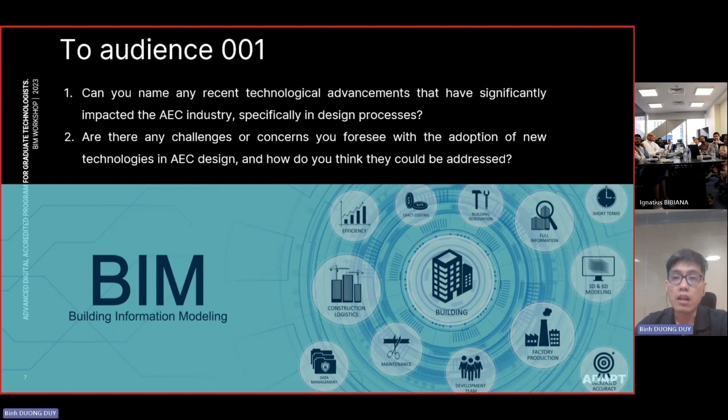A couple of ideas you mentioned are also covered in this slide, based on our ADAPT study. The big changes in technology happening right now in our industry: first we need to mention augmented reality, because this is very important now. Most advanced design offices already have their own team on how to utilize the BIM model for visualizations, and augmented reality is the main thing in that visualization technology.

The second is digital twin. I think some of you guys may hold that role too, right? Digital twin is more about the phase operations, facility management, like after design and construction. But they also need to get involved from the stakeholders, like the design team. The consultants also need to be there. So this one also brings a lot of impact into design teams.

The third one will be Internet of Things and big data. Even though that thing is not really so prominent in our industry yet, very soon I believe, based on some studies already, Internet of Things will also change our workflow or our industry in terms of technology.

And the fourth is something you mentioned, that's artificial intelligence. Now it's become viral on many platforms, on many forums. This is a new thing actually, but it's already become viral with a lot of new tools and new products coming from AI.

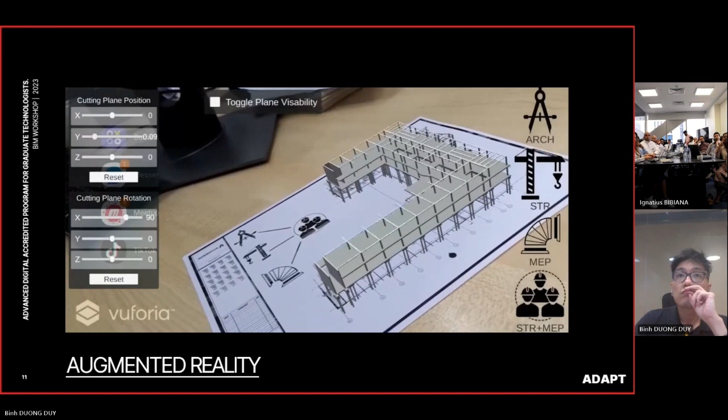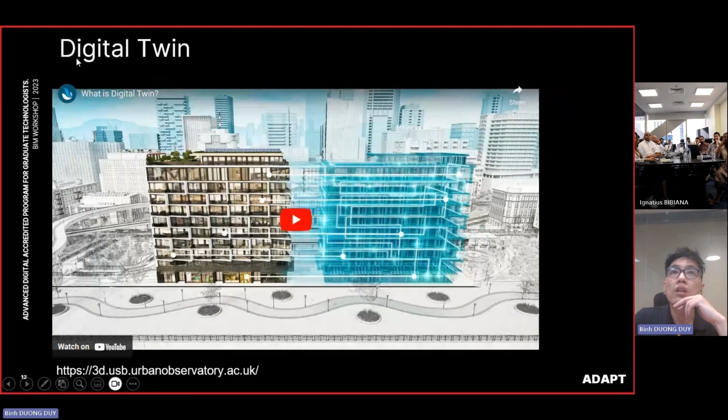I'm using this one video to define what a digital twin is.

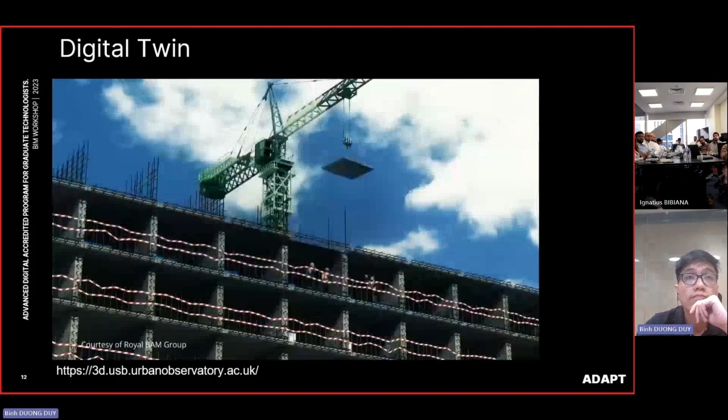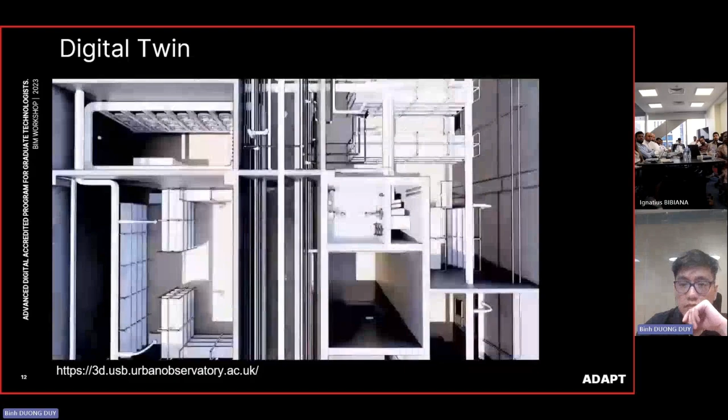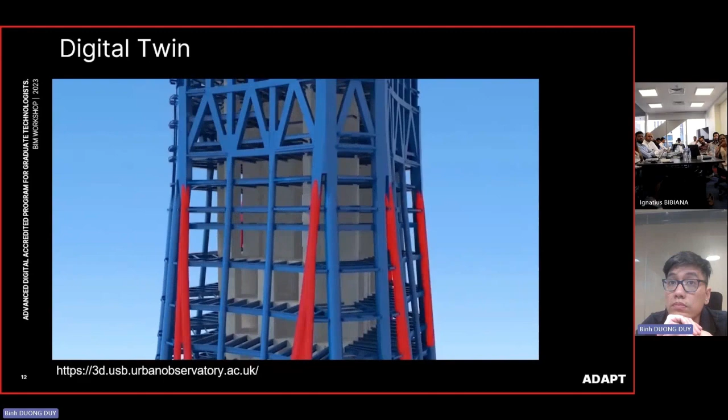But do you know what a digital twin is? Essentially, it's a digital version of a physical object—a dynamic, up-to-date digital replica of a physical asset or environment, built using technologies like building information modeling, artificial intelligence, machine learning, and the Internet of Things. Data from the original asset is used to build and improve the digital twin, which is built based on the BIM model. By providing a precise, up-to-date model of its original, a digital twin can help designers, engineers, contractors, owners, and manufacturers create more efficient structures. Digital twins can help with everything from planning, design, and construction, to operations and maintenance. Consider a building that's already been designed and constructed—imagine there's a digital twin of the entire facility, from the roof to the HVAC to the mechanical, electrical, and plumbing systems. Now imagine that sensors in the building provide the digital twin with real-time information. The digital twin updates itself according to the data. Then building owners can view areas where the building is aging or faulty and make improvements.

On a greater scale, multiple digital twins can be integrated into an entire ecosystem.

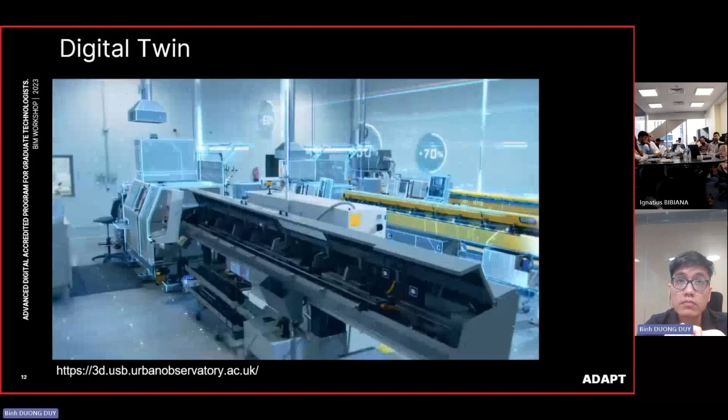So how did digital twins get their start? In the 1960s, NASA was one of the first agencies to use mirroring technology to replicate systems in space. Notably, NASA created a replica of Apollo 13, which became critical in the midst of its challenging mission. Engineers were able to test solutions on the replica to avoid further disaster. Dr. Michael Grieves, Chief Scientist for Advanced Manufacturing at the Florida Institute of Technology, introduced the concept of the digital twin at a Society of Manufacturing Engineers conference in 2002. He proposed a product lifecycle management center that contained the elements of a digital twin: the physical space, the virtual space, and the flow of information between the two.

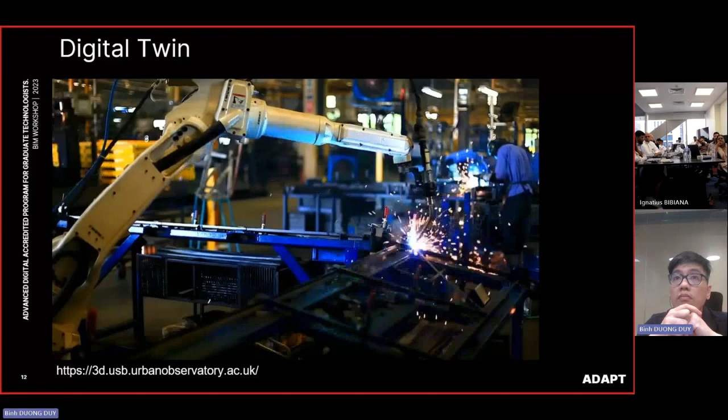The manufacturing industry was quick to adopt digital twins, and the architecture, engineering, and construction industry followed suit, with the help of technological advancements like BIM, or Building Information Modeling. Today, digital twin technology plays a big part in the digital transformation of the design, engineering, construction, manufacturing, and maintenance industries. A digital twin starts with knowledge of the assets and spaces that make up a facility. This type of descriptive twin is a live, editable version of design and construction data, such as a visual replica of assets or facilities. An informative twin has an added layer of operational and sensory data. As more and more data is added, the twin becomes richer and more strongly linked to its physical counterpart. Predictive twins are able to leverage this operational data for insights, while comprehensive twins simulate future scenarios and consider what-if questions. In the future, twins will become autonomous, able to learn and act on behalf of users.

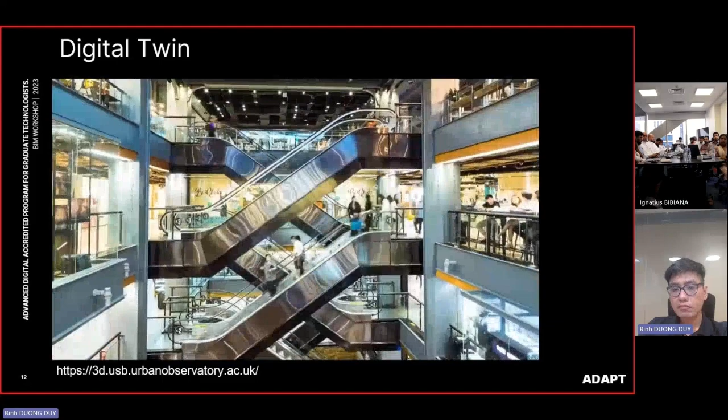Because digital twins can gather key information about things like population growth, natural resource supply levels, and historical data on environmental disasters, they can help build more resilient cities and infrastructures as the world changes. Eventually, an entire ecosystem of digital twins will help industries respond to global challenges with powerful, simultaneous changes. Right now, digital twins are helping operations and facility managers respond faster by removing the need for complex and time-consuming maintenance documents. Owners can gather information from the design and build phases to make faster business decisions, lowering operational and maintenance costs. Professionals on-site can predict material and labor cycles, reducing waste and enhancing safety. By helping professionals gain more insight into the inner workings of the world, digital twins are becoming partners in building a better future.

Okay, just a short video introducing the idea of digital twins. In the video, they also mentioned that the Internet of Things is part of developing digital twin products by connecting sensors.

So basically, a digital twin in IoT is just like having the BIM model connected with real data from the physical buildings or physical facilities. By connecting data from sensors, this allows you to make predictions and utilize that data for running your facility management.

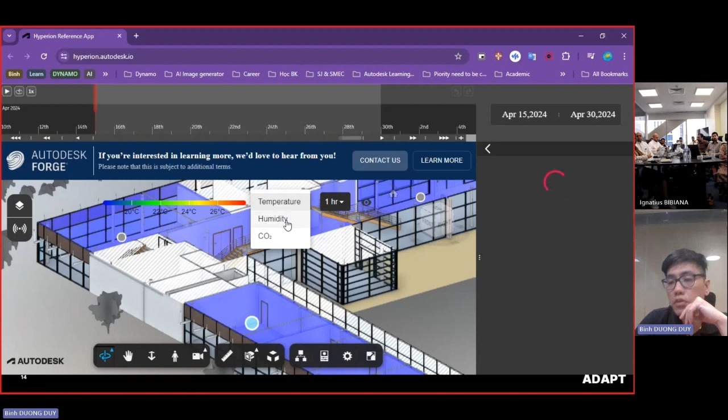What they have are connections with sensors inside the buildings, allowing you to check the data of the buildings, like the temperatures inside every room, humidity of the rooms, and carbon dioxide. From this, you can run your facilities more efficiently and run some analysis for facility management.

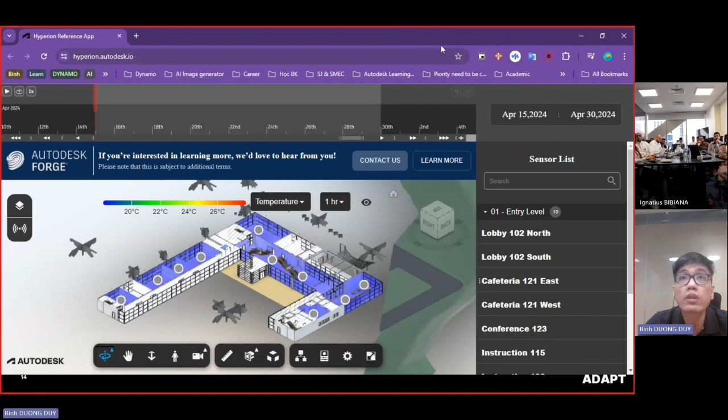This is one video, sorry, one link to try out this idea of what digital twins are. We also have another video link here. I will send this document to you and you can check it by yourself.

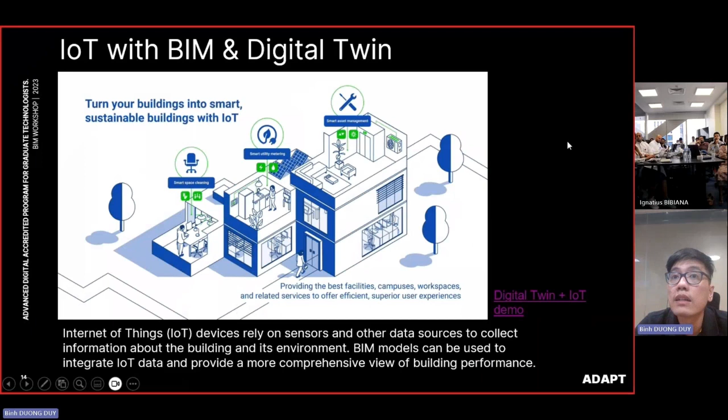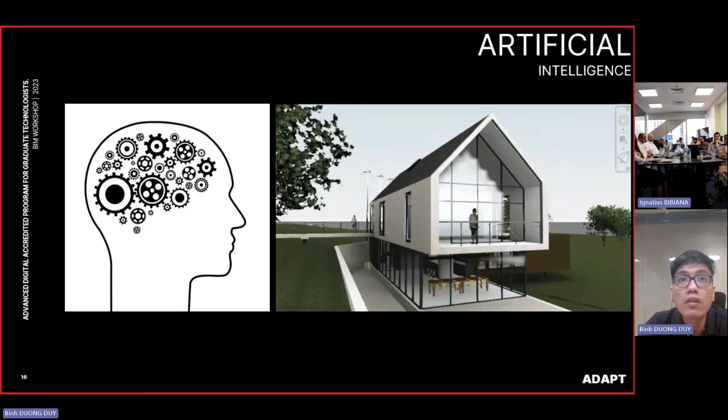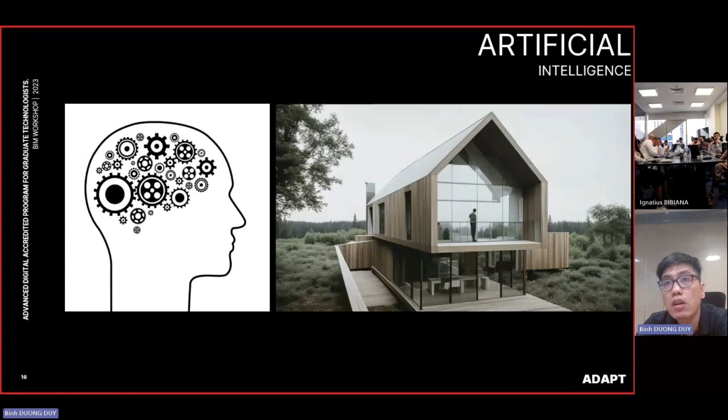Another technology I want to mention here is AI, or artificial intelligence. Right now, we have seen some AI helping to visualize or convert what we call a prompt - it means a text - into an image, or helping to visualize your idea. But actually, AI can do more than that. This is one video explaining how AI can be utilized for quantity checkup.

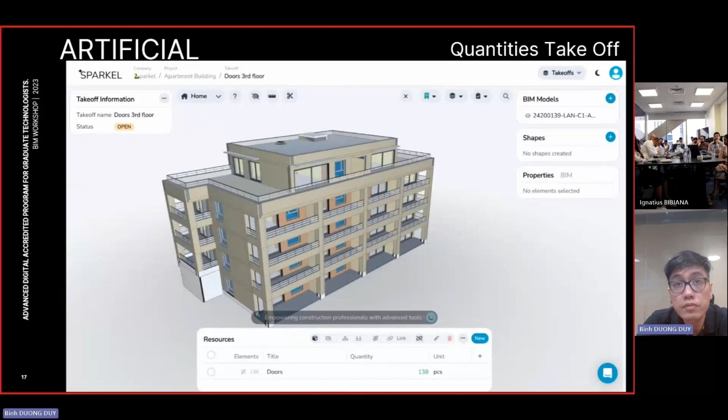Of course, you need to have the BIM model already with you. Just by typing some comments or prompts, you can harvest the information in the BIM model. In this case, the person tried giving some comments like trying to take off some doors and windows on the BIM model using different language. So the AI is able to help by isolating the elements, only doors and windows. So this is one AI already here to help people harvest information like quantity takeoff from a BIM model. We also have another slide to demonstrate how another AI can help, like this one can help on architect work.

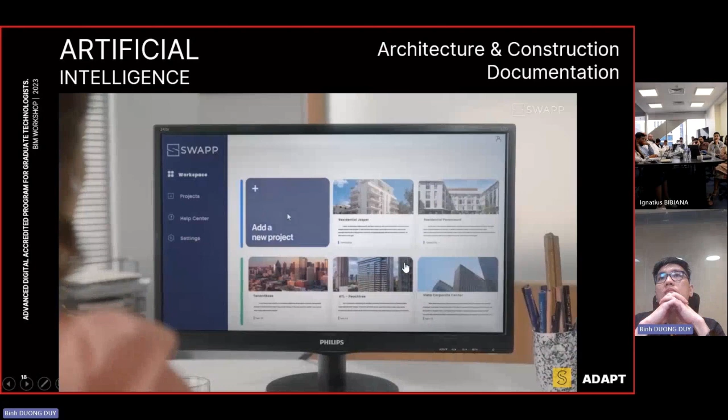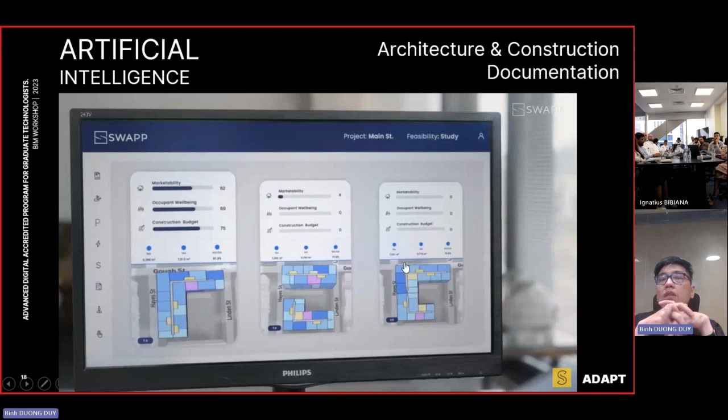Hi, Alice. Glad I caught you. Hi, David. How's the Main Street project? We got the green light, but we need to get things moving fast. So when can we meet to review? Say two weeks? No need for that. Just give me a few moments to upload the details. Here, take a look. This one is optimized for the project's budget. Wow, well, I thought asking for only two weeks was pushing it. This is great, but can we update the facade to what we used in the Wilson project? Sure, like this. Oh wow, wait, are these the full set of construction documents? Yep, code compliant, fully coordinated with structural systems and MEP. Let your GC know we're all set for the permit. Okay, this is all too good to be true. How does SWAPP do all this? Simply put, it's AI in architecture.

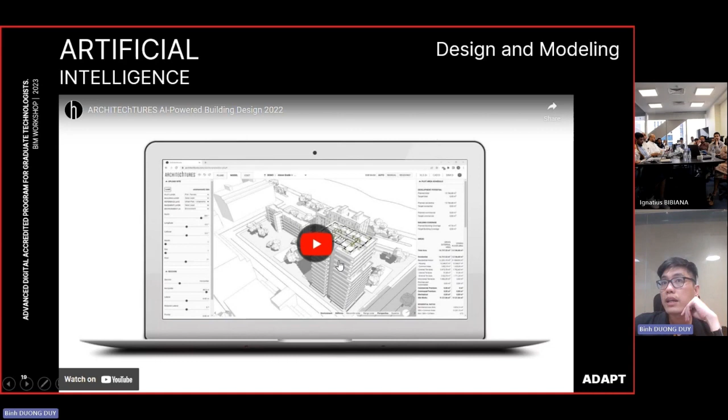Let's SWAPP - yeah, so actually AI now helps a lot with design workflows. The video you just saw is just a commercial video, of course, but it also showcases some capabilities AI already has right now in architectural design. But it's true, I have some experience using a couple of different AI tools.

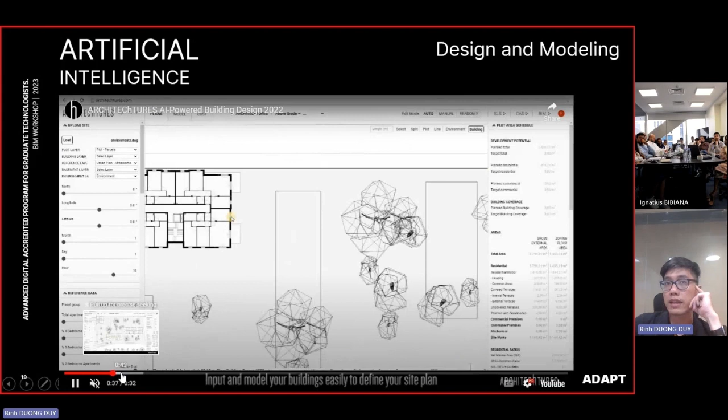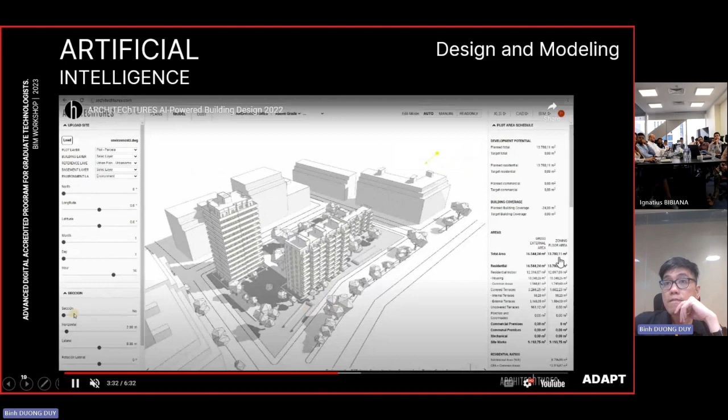For example, this is another AI. It can help you convert an idea just by drawing some basic sketch lines. It can help you generate the whole BIM model. And not only the BIM model, you can also achieve drawings - not exactly qualified drawings, but they can give you some idea, some kind of product-like drawings. So AI is already evolving in our industries and helping a lot with cutting manual work.

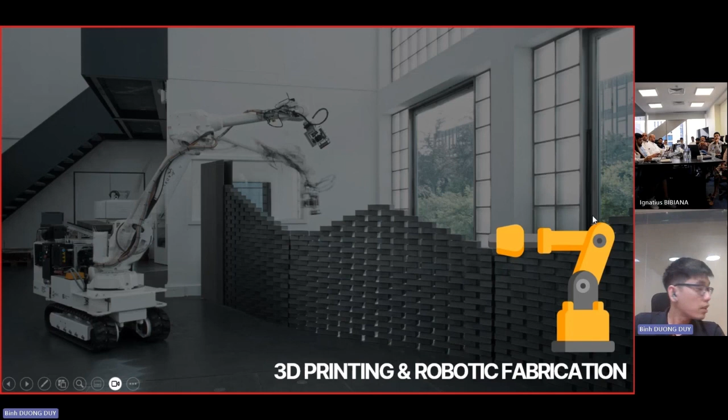The last one is 3D printing and robotic fabrication. This is another technology having an impact on our AEC fields. This is one real project from the B1M.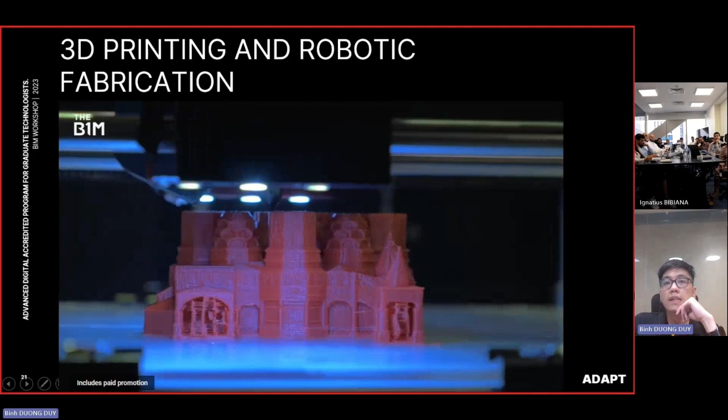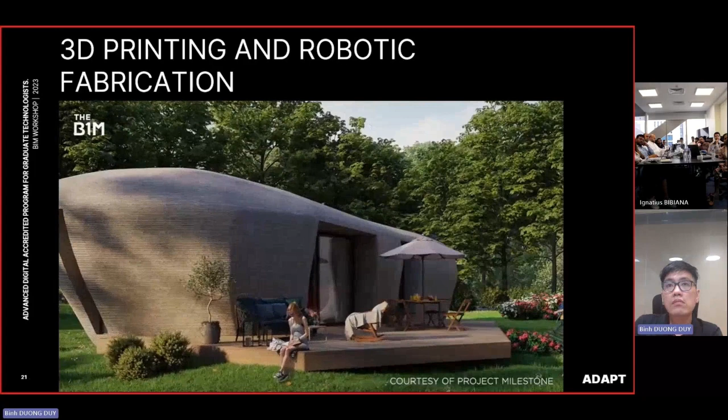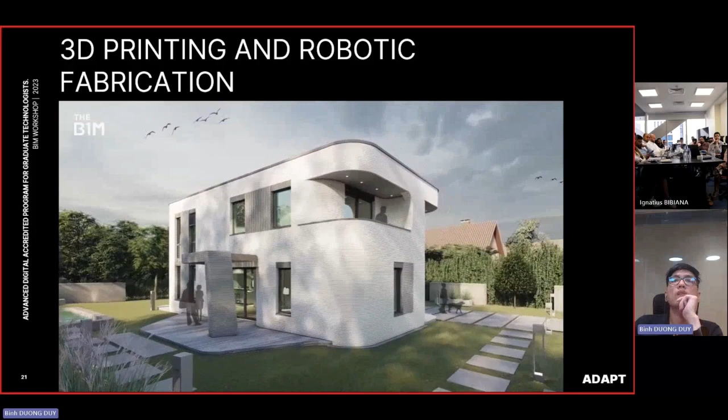The idea of 3D printing our buildings is nothing new. Faced with a desperate need to construct more homes faster and in a more efficient way, countless innovators have found themselves drawn by the idea of being able to quickly print a structure, and have spent years trying to scale the technology. But for all their efforts, that 3D printed world has proven elusive, and many impressive prototypes have struggled to become viable for mass production. But things have just taken a massive step forward in Germany with the completion of the first ever 3D printed home to become fully certified under a national government's building regulations. The impact of this moment for construction and for the buildings we all use could be huge.

Because the video is quite long, I'll give you guys the link to check out later. What we want to say is that 3D printers and robotic fabrication already exist in construction industries now, and they're helping a lot to improve productivity and accuracy in the construction field right now. The main point about this technology is that they actually take BIM, the BIM product, as the basic input. No matter how advanced the technology, they also consider using BIM as the core input to develop and utilize these technologies. So BIM actually plays a very important role in helping us achieve these kinds of advanced technologies. So what is BIM?

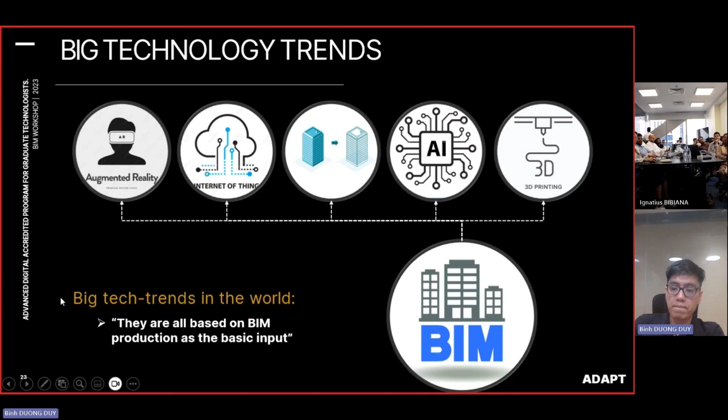Basically, these are good questions, but I would like to ask for some experience from you guys, since you already have some experience. Could you please share some of the experience you have?

So the first question is: have you ever studied BIM, or have you practiced BIM before? And how do you understand the term building information modeling? Are you asking about graduates, or from experience?

From the experience? Okay, well, I have studied BIM. I have some certifications as well. My understanding of BIM has three definitions, but when people usually ask me about BIM, what is BIM in your opinion?

So I say that BIM is a process, but in easy plain language, every piece of information about the building is inside the virtual model. This is one definition I usually try to give to people so that they can understand what we are talking about, what BIM actually is, along with the process.

Along with the process, we have a management phase and an information delivery phase. The BIM information delivery cycle consists of the management phase and the information delivery phase. As per the specification guidelines, you are already aware, like PAS 1192 part 2.

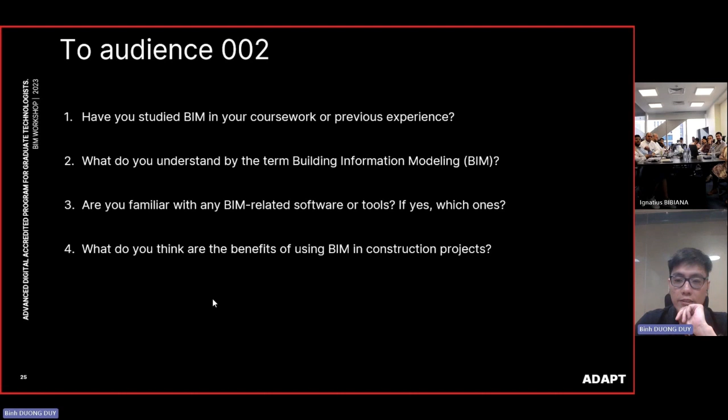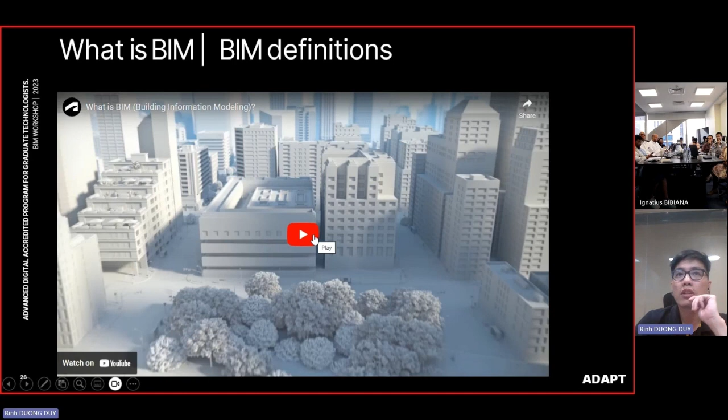This is for introductions, for people who have no experience, though some of you have a lot of experience here. I'll use a video from a BIM expert company, an expert organization, to help explain what BIM is. If you want, we can go through this.

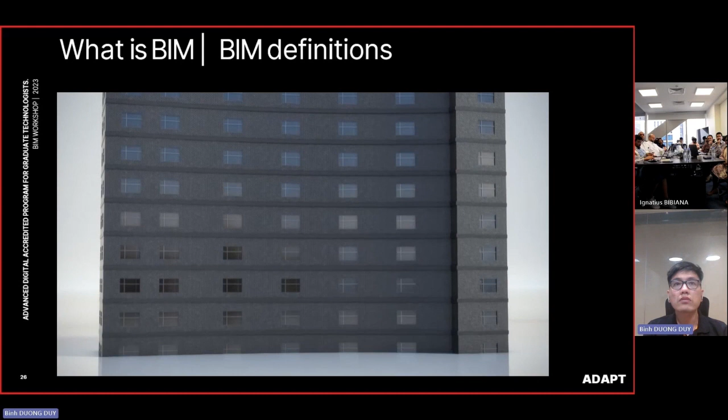These days, a growing number of architects, engineers, and contractors are using BIM, and here's why. Global trends are making AEC projects more complex, while advances in technology are helping industry professionals work more efficiently and effectively. This is where BIM comes in. BIM is an intelligent model-based process that connects AEC professionals so they can more efficiently design, build, and operate buildings and infrastructure through BIM, or Building Information Modeling.

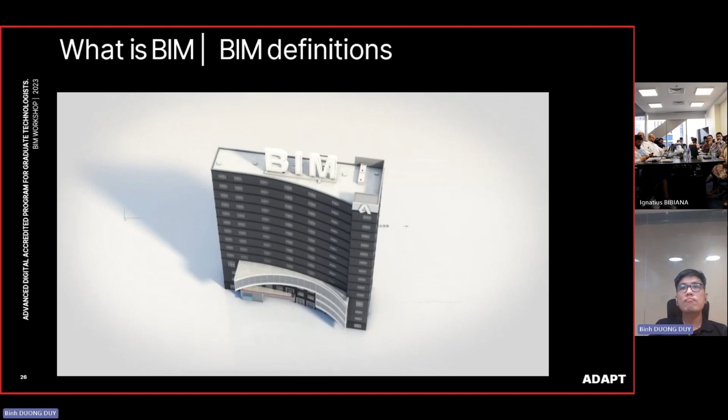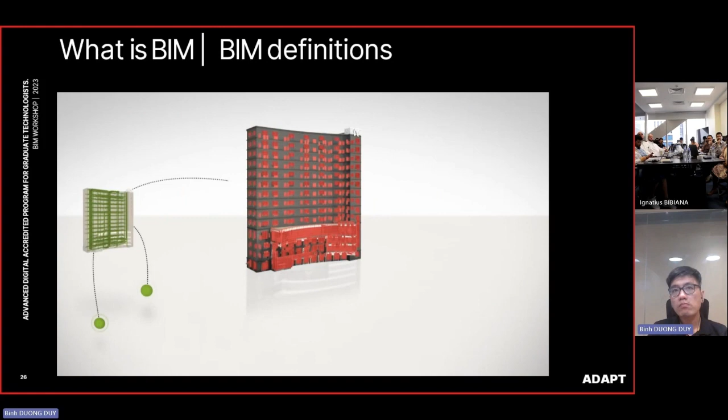With BIM, designers create digital 3D models that include data associated with physical and functional characteristics. The power of BIM is how it allows architects, engineers, and contractors to collaborate on coordinated models, giving everyone better insight into how their work fits into the overall project, ultimately helping them to work more efficiently.

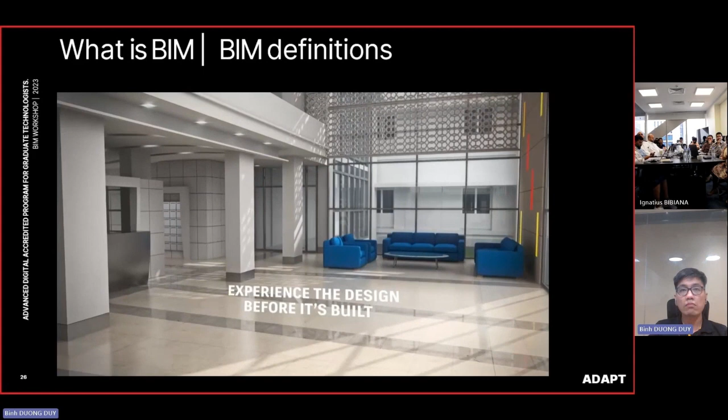The data in a model defines the design elements and establishes behavior and relationships between model components. So when an element in a model is changed, every view is updated, with the new change appearing in section, elevation, and sheet views. You can use the information in the model to improve your design before it's built. Gain faster buy-in and approvals with realistic visualizations. Convey design intent to the field. And, most importantly, retain model intelligence from concept to construction.

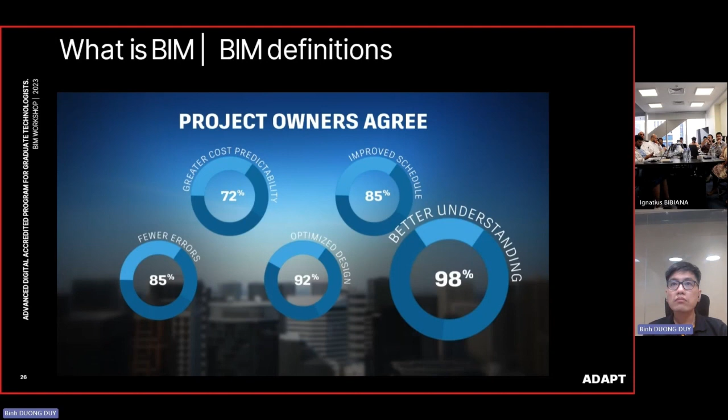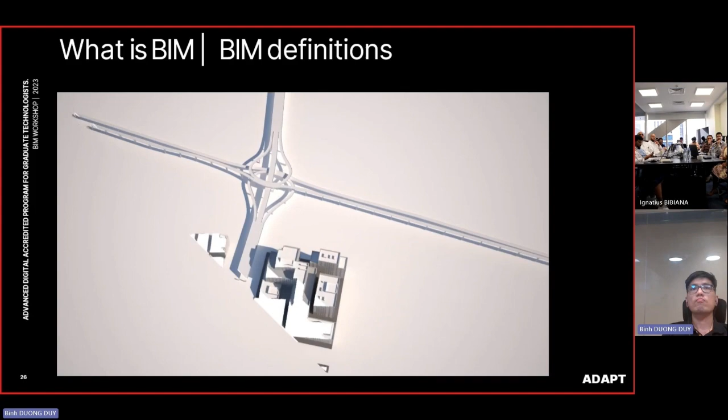BIM provides insight into a design's constructability, improving the efficiency and effectiveness of the construction phase, and also providing a better understanding of the building's future operations and maintenance. Owners can use BIM for predictive maintenance, asset tracking, and facilities management, and for future renovation or deconstruction projects. When you work with BIM, you'll experience reduced project risk, improved timelines and cost savings, and better project outcomes.

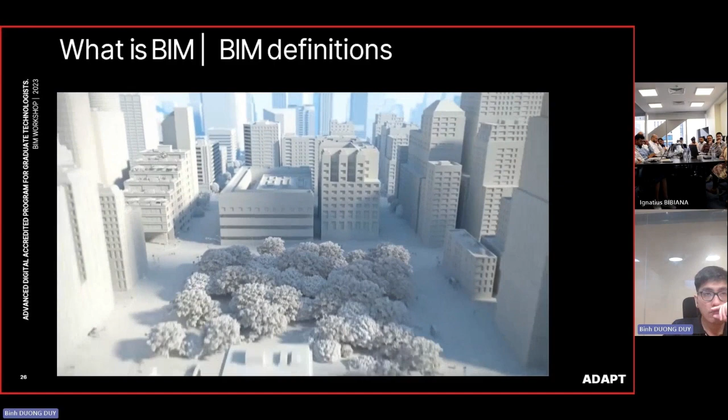And the power of BIM is growing with cloud-connected technologies that let project teams design and work together in all new ways. Driven by global trends, the AEC industry is in a time of transformation. Businesses that want to win more work, deliver projects more efficiently, and design better buildings need a powerful solution. And that solution is BIM.

So you may see this definition is quite simple, because this program is designed for the person who does not really know much about BIM. So we try to focus on how to give the easy way to approach BIM by introducing the technology. Then we introduce what the BIM product is. Of course, BIM doesn't only stop there; it's also the process. But we're gonna have another section to discuss the process. How do we set up BIM? What kind of protocol on BIM? That will be mentioned later on a different slide.

This is also another definition of what BIM is, but comes from a different aspect. When they mention more, what is BIM? BIM is very much talked about in the building industry, but what is it really? What is it used for, and who should use it? Some say BIM is a type of software. Some say BIM is the 3D model of buildings. Others say BIM is a process, or that BIM is nothing more than an organized collection of all building data. BIM is all of the above and more.

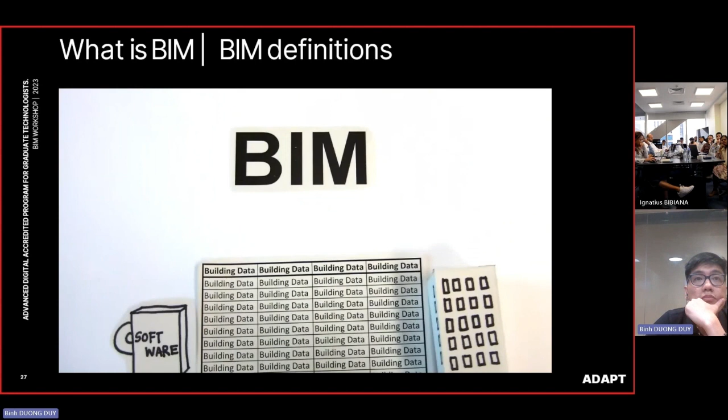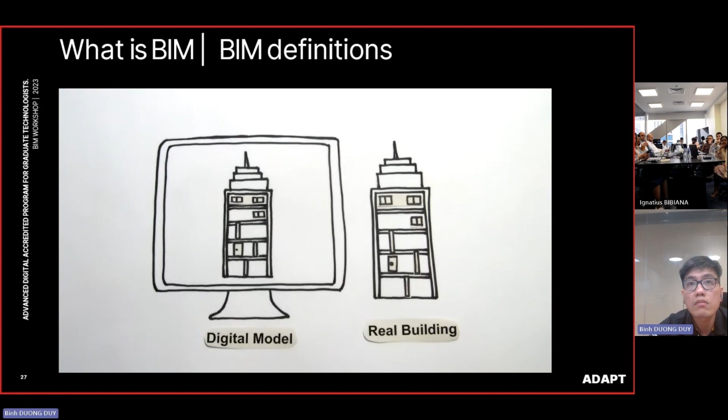Now let's see BIM explained in layman's terms. When it comes to BIM, everything begins with a 3D digital building model. This model, however, is more than just simple geometry and some interesting textures added to it for visualization. A true BIM model consists of the virtual equivalents of the actual building sections used to create a building. These intelligent elements are the digital prototype of the physical building elements such as walls, columns, windows, doors, stairs, etc., that allow us to simulate the building and understand its behavior before the actual construction begins.

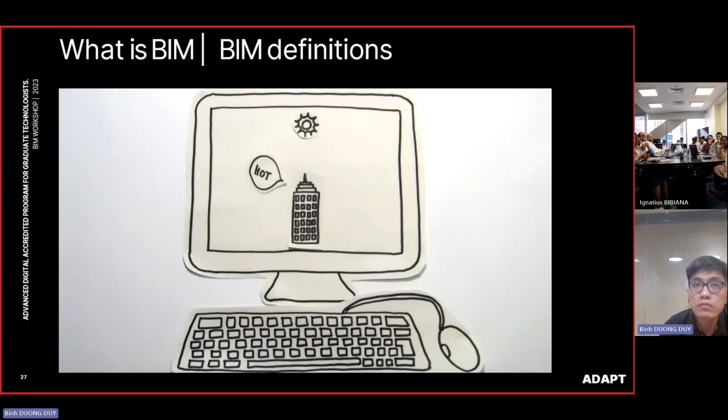Now let's see what a BIM model can be useful for. 3D visualization: of course, the most basic use of a BIM model is for creating realistic visualizations of the planned building. Your BIM model helps your design decisions by comparing various design alternatives and for selling your design to your client, the local community, and other stakeholders as well.

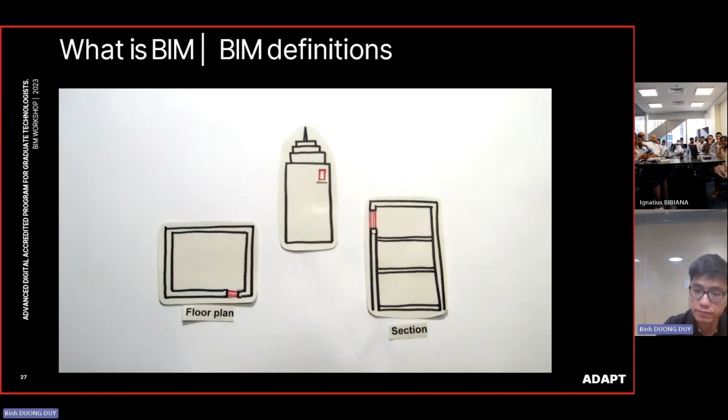Change management: since data is stored in a central place in a BIM model, any modifications to the building design will be automatically replicated in each view, such as floor plans, sections, and elevations. This not only helps in creating documentation faster, but also provides stringent quality assurance by automatic coordination of the different views.

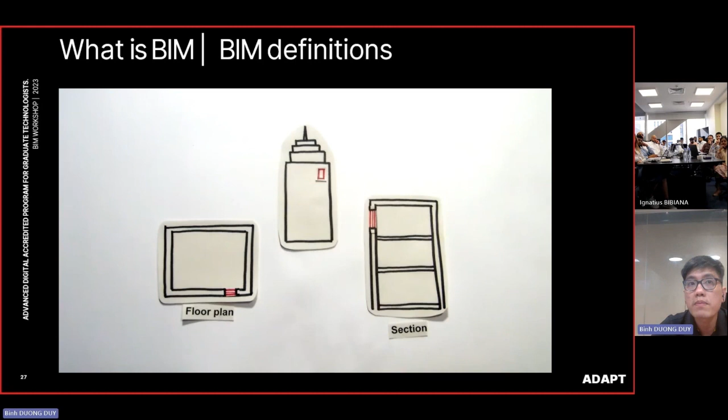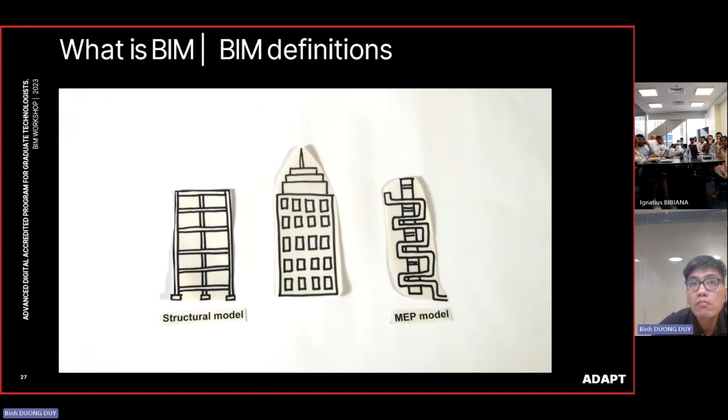Building simulation: BIM models contain more than just architectural data. Information about the different engineering disciplines, sustainability information, and other characteristics can be easily simulated well in advance of actual construction.

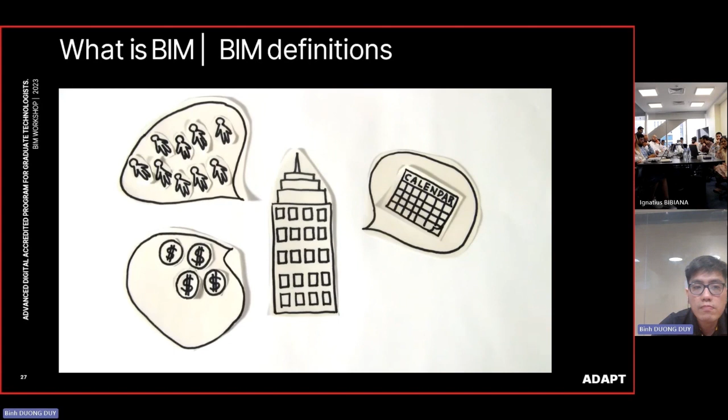Data management: BIM contains information that is not visually represented at all. Scheduling information, for example, clarifies the necessary manpower, coordination, and anything that might affect the outcome of the project schedule. Cost is also a part of BIM that allows us to see what the budget or estimated cost of a project might be at any given point in time during the project.

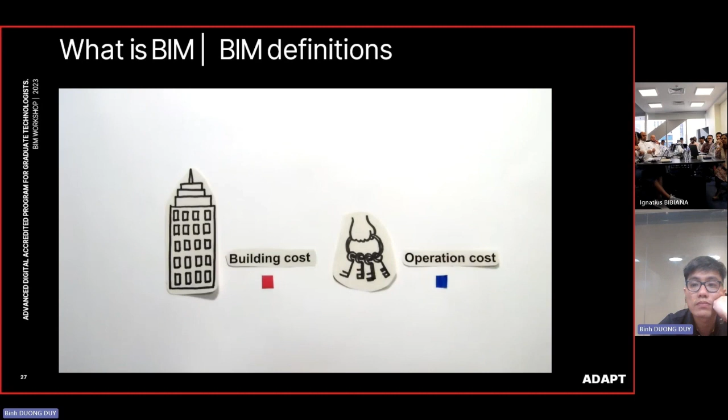Needless to say, the data put in a BIM model is not only useful during the design and construction phase of a building project, but can be used throughout the entire building lifecycle, helping to reduce the operation and management cost of buildings, which is significantly more than the entire cost of construction.

With all—oh, sorry. Yeah, but it's also very similar to the previous videos that try to help understand BIM from different kinds of function of BIM or BIM views, and also the benefits BIM has to offer.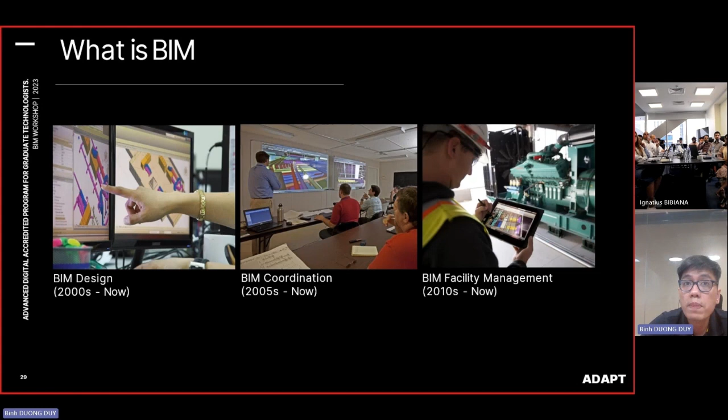The evolution of BIM can be considered from sketching lines to digital lines, then transformed to geometry modeling, 3D modeling. But in BIM, we no longer use the term geometry or shape or form, 3D shape or 3D form. We call it a digital object, meaning it has the function of that object, like it could be called a digital wall, a digital floor - meaning that object not only contains graphics information, but also contains functions, properties, relations, or machine interpretations.

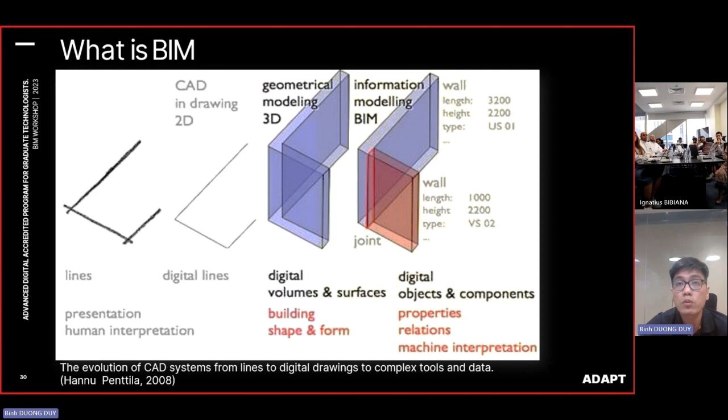That's a new concept - we no longer call information inside the 3D model just geometry. We call it objects with functions. So a BIM object can be considered as a combination of product data and product geometry.

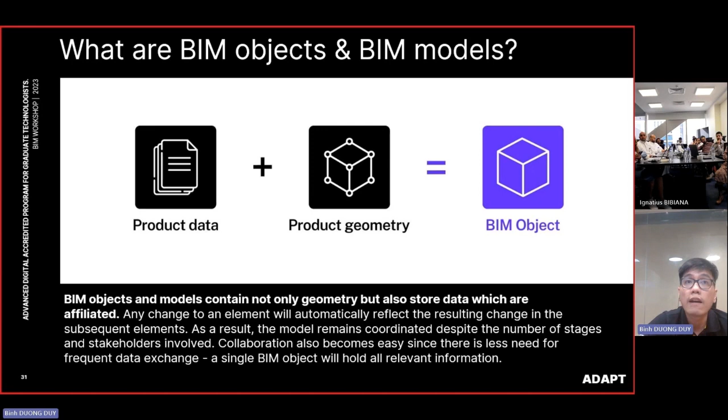So what is the definition of BIM? We're taking one standard, common definition used globally - that's the definition from the US National BIM Standards Project Committee. It's a digital representation of physical and functional characteristics of facilities, and a shared knowledge source of information about the facility that forms a reliable basis for decisions during the life cycle. It helps improve collaboration between different stakeholders in different phases of the life cycle of a facility.

Basically, we can extract this definition into three points. First, this is the process involved in data management from rich data of a 3D model for multiple purposes. Second, a virtual information model can be handed from the design team to the contractor, meaning you can hand over this information between different stakeholders and different phases of the project. And this information can go throughout the entire project life cycle. So from the definition, we can summarize BIM into these three main points.

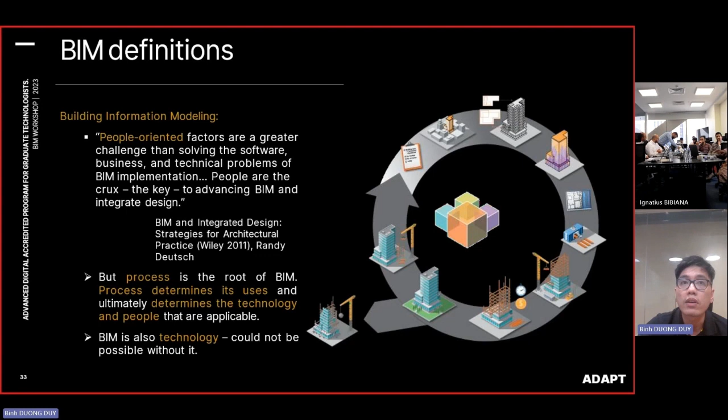When we look deeper, we can see other definitions from different work. They try to showcase that people are an oriented factor for greater challenge than solving the software, business, and technical problems of BIM implementation.

Internally, our team, Advanced Digital Technology, tries to define BIM in a simple way with three factors. BIM is defined based on three major factors: first people, then process, then technology. We consider how important each factor is - like 30% of the definition of BIM is about technology only, and 70% involves the process. But to utilize BIM, obviously we need people - a team that's ready to adopt BIM technology and willing to apply BIM in their daily work.

So in our internal definition, Advanced Digital Technology, we define BIM with these three points, with 100% laid down on the people, on the teams.

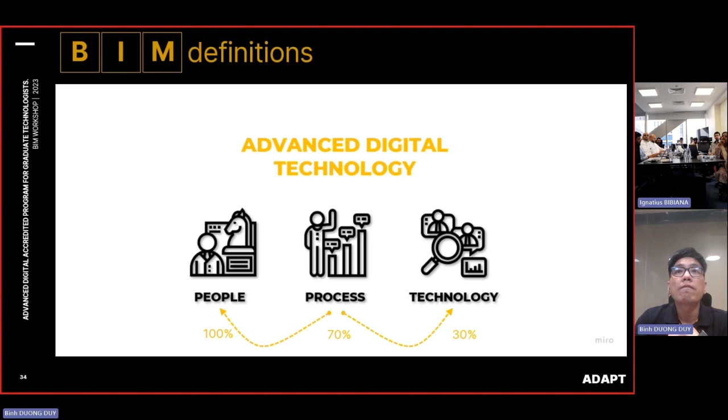I would say this just helps the audience understand. I was just asking about other definitions if you guys know them, and how you'd define the short term of BIM, what BIM stands for. But I think we can skip that since most of you already have experience.

Actually, BIM can also be defined in different ways. Of course, BIM is building, but it doesn't stop at just buildings - it could be a facility, could be any kind of property.

And the I stands for information, but some other definitions in the world also say this information needs to be intelligence. This I can also stand for integrated, since BIM doesn't stop at the product - it also includes the process. So integrated is more important to mention in later terms.

The M, of course, everyone knows stands for modeling, but some other definitions mention that M should stand for management. If, after the design process, the model is used for different BIM uses or different BIM benefits, then management of the information - or information management - becomes more important.

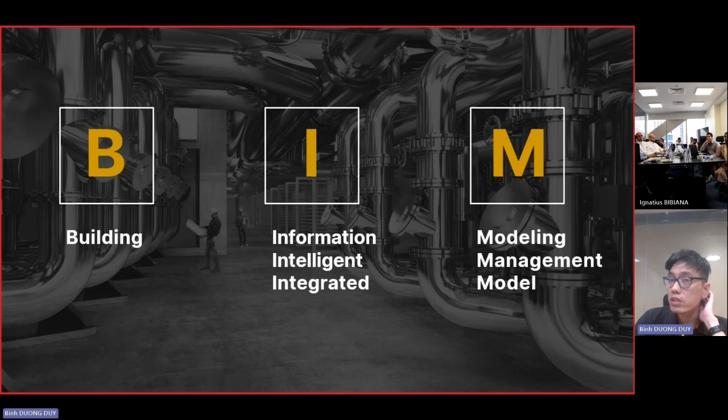From 2D to 3D and then BIM - if you look at the history, the traditional process is obviously a linear one, where every design phase or every phase of the project is laid down on one line. We have to finish one by one first. But with the BIM concept, they try to bring the idea of an integrated process when all the processes surround the model at the center - the center of information is BIM.

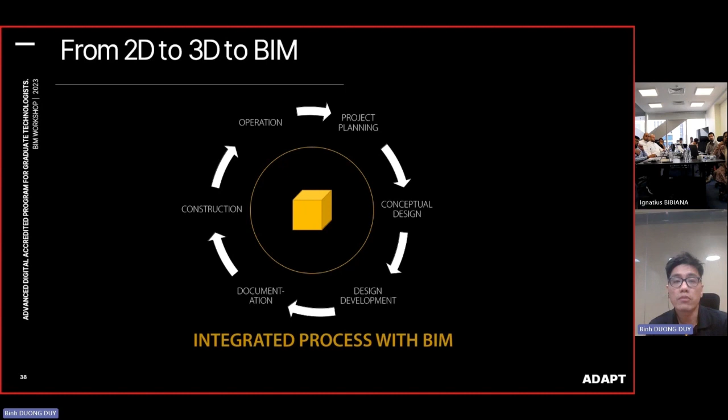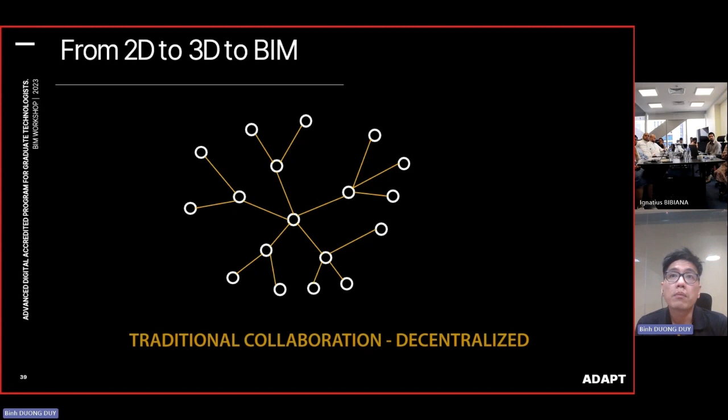Traditional collaboration is decentralized, when every stakeholder just shares internally, and we don't really control the information being shared or exchanged between different stakeholders. But with the BIM concept, we bring the idea that stakeholders share information through one platform or one kind of model - what we call centralized. So the information will be shared on one platform, one place, one center.

So I also want to give an example to demonstrate what's happening right now - the current practice in India about CAD and 3D modeling. Every design consultant shares their design based on drawings, on 2D drawings. All the information is shared by drawing - the official information, the approval information, up to the submission time, and even going to the design tender stage, the official information is still laid out on 2D drawings.

After that, moving to the next phase, the design consultant keeps using 2D drawings, but they also try to integrate with 3D modeling, or BIM. It's a separate way. But the clients also accept only based on the drawing. So sometimes the process happens simultaneously between 2D developing and 3D developing. Even at the end of 3D modeling, they also produce drawings as the final product, but because all the drawings have been approved by the client, this drawing may become unnecessary.

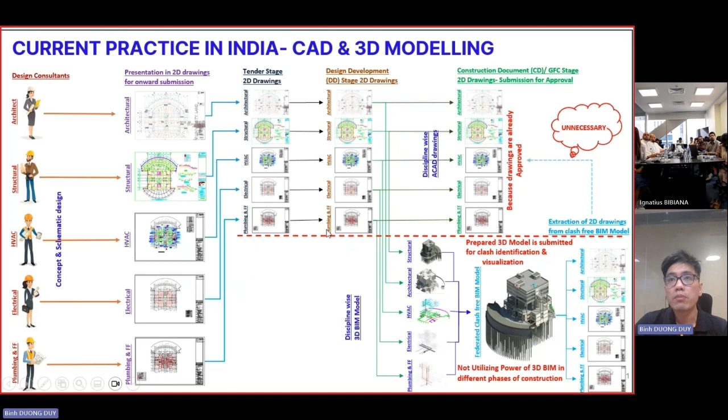So this is the gap that happens in India - the whole process is still laid out on 2D CAD or AutoCAD drawings. 3D modeling or BIM models were there, but didn't really matter except for visualizations, and they don't consider that information as the official information for sharing. So they are using BIM, but not actually with the idea that BIM is the center of the information exchange.

So right now, when we're working on one project - the airport project in Delhi - we try to change the approach, the methodology, how we are using BIM on the projects. Every stakeholder, every design consultant, when they join now, has to give a 3D model, and this is considered the official information for sharing, for getting approval by clients. So this 3D model needs to get approval first before drawing approval. BIM will be leading the process, the design process. The BIM product will be considered for final approval.

So after we have the BIM model from the different design consultants, we try to use BIM tools to utilize BIM functions like clash detection, analyzing the BIM model based on functions like energy analysis, quantity checkups, project schedules, monitoring and controlling with construction. Then we have the clean model - we call it a clash-free model. Then we can extract the information from the model as drawings. So the drawing is there, but it's also considered as final approval, but first the 3D model needs to get approval by the client first.